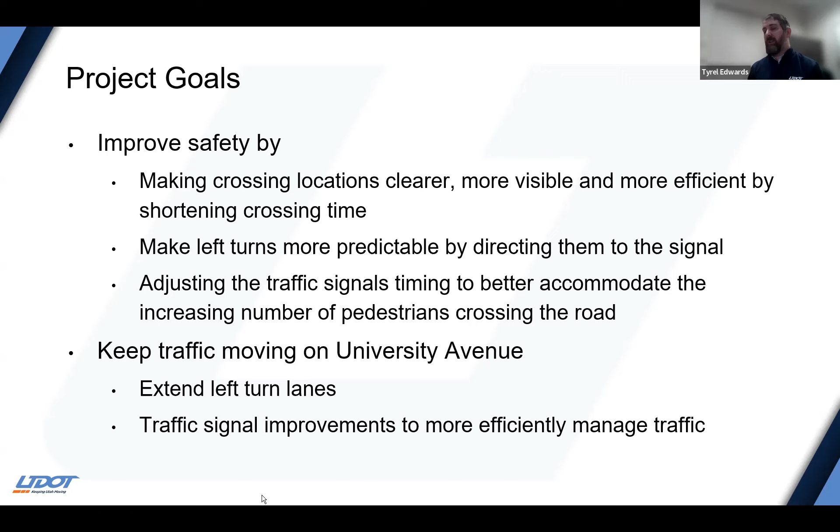And we also want to keep traffic moving on University Avenue by extending the left turn lanes, helping that left turn movement that is up at Cougar Boulevard that has some impact on this signal, and improve the traffic signal just by more efficiently handling the traffic at this intersection.

So the proposed changes for this intersection can kind of be broken out by the road that we're on. The main goal is to realign Canyon Road on the east side to square up the intersection. Right now, it comes in at an angle that's not really ideal. And by realigning that intersection, we can improve the visibility for all members of the traveling public, for the pedestrians, for the bicyclists, and for the people who are driving through this intersection. It helps people to be able to see each other and be aware of what's going on.

We're going to eliminate one of the existing east side pedestrian crosswalks across the free right. This helps us to move pedestrians to a place where they have a more managed, more controlled crossing. It's safer if they can cross where the signal is. Other improvements on Canyon Road, they're not necessarily on this list, but we are adding painted green bicycle boxes on Canyon Road. We're adding a sidewalk to the south side of Canyon Road to help pedestrian traffic as they move there.

And then we're also adding a through lane to provide access to BYU's Western campus right now and as it develops in the future. And then for University Avenue itself, we're going to be closing that free right, like I mentioned before. This will reduce the overall length of the crossing and consolidate all those crossing movements to a more

controlled setting. Pedestrians crossing at Canyon Road right now have some issues with visibility, and there's some issues where the shoulder lane that exists right now has bicyclists traveling on it. Drivers can tend to encroach on that shoulder as they take that free right. They take it at high speed. The exit to the Zions Bank property is impacted. It's difficult to see vehicles that are entering that free right as you leave the Zions Bank. So there's some improvements to safety by removing that free right.

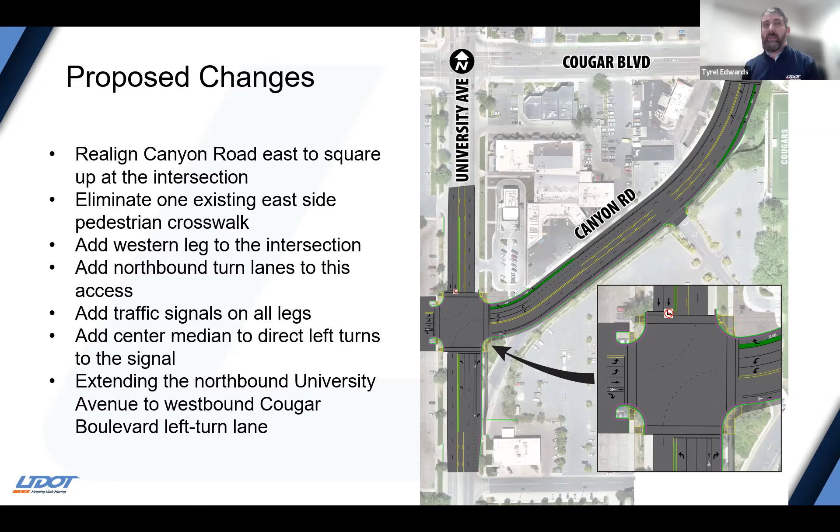So potential impacts of this project are the raised medians. We do know that they impact people's access to parcels and to properties along the road. We're keeping them short in this case, and the main benefit of them is safety. That's our main concern, is improving safety. It can be a difficult thing to manage safety, as we have drivers trying to enter a two-way left turn lane from both directions, trying to go to opposite sides of the road. It presents some conflicts that we're trying to help alleviate.

And then the realignment of Zions Bank. So with us removing the free right, we're removing the access or the exit from Zions Bank from that free right onto University Avenue. Vehicles will still be able to either stay in the right turn pocket and go back onto Canyon Road, or go up northbound on University Avenue.

All right, Lee, I think you wanted to have Tyler move into this one, right? I'm over here talking away with my mute on.

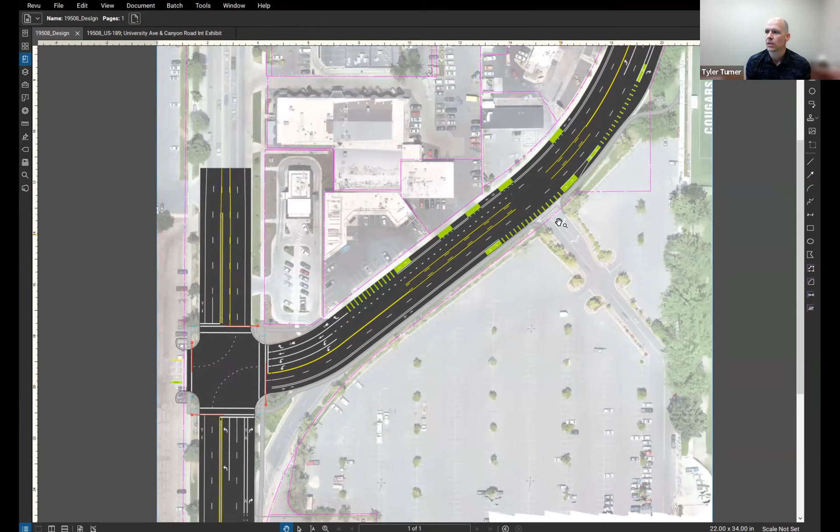We're going to have Tyler walk us through the design in a little more detail. So let me get that shown here. Can you see that, Tyler? Can. Tyrel did a great job in giving us an overview of the improvements that we're looking at this intersection. Lee, if you would zoom into the intersection. Let's start there, and then I'd like to go along each leg of the intersection.

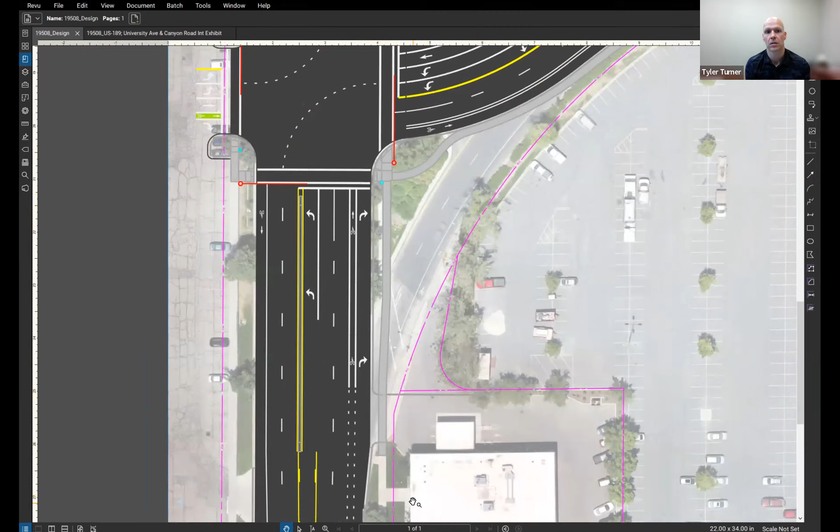So as she zooms in, you're going to see the realignment of Canyon Road off to the right to the east direction. That improves safety by squaring up the intersection, and continues to provide the dual lefts. As we look along the south side of the intersection, so as we go south towards Zions Bank, you'll see the yellow lines there, just to help everybody understand.

When we talk about the raised medians, you can see the left arrows. That is just a short distance of that. And again, as Tyrel mentioned, by including just that short distance, it improves safety. It helps control turning movements to make sure that we prioritize and keep the signal optimized as it's running, but also make sure that we don't have conflicting movements going into accesses.

You'll see as we zoom in towards the Zions Bank, the way that access is being configured, accessing onto University Avenue rather than onto that free right going onto Canyon Road. So you can see what that looks like. That will restrict left turns out of there. We have been in contact with Zions Bank and initiated that, and so far those conversations are going really well.

As we continue north, maybe just one point before you move on, off to the left side on the BYU property, there's an access. One of the things that we're doing, and I'll try to point them out as we go along this design, is we're actually consolidating accesses where we can, and coordinating with those property owners. It's just improved safety as you consolidate those accesses and try to get it all to a single access, especially when there's a signalized intersection close by.

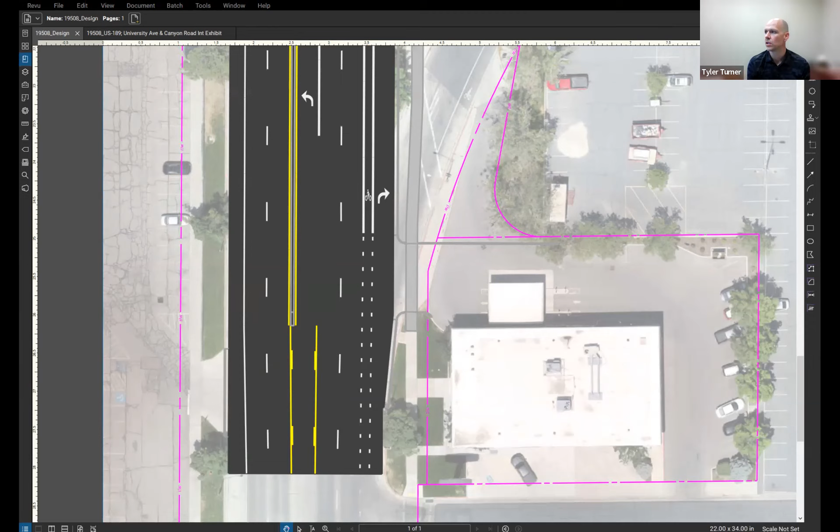So as you go towards the north, you'll see, go ahead. I couldn't get my mouse. I apologize. No worries. So let's spend just a second here.

You'll see how the free right has been closed off. We still maintain a right turn lane, and that will be dedicated. But we do show closing that free right. You'll also see that we have added, if you go just a little bit further north, there are 2 crosswalks crossing US 189 or University Avenue.

As we've talked about with the projected improvements of BYU, pedestrian crossings are predicted to drastically increase here. That's been a big focus of ours as we've talked about the improvements of the intersection, and those crosswalks have been a big part of that. So we'll have crossings on both sides.

Off to the left, you'll see the access has been created into the BYU property. So the 4th leg, or the west leg of the intersection, as we've been calling it. The plans of BYU's property we can talk about later, but you can kind of see that we've accommodated access into the signalized intersection by creating those actual lanes designation, which will be coordinated by the traffic signal.

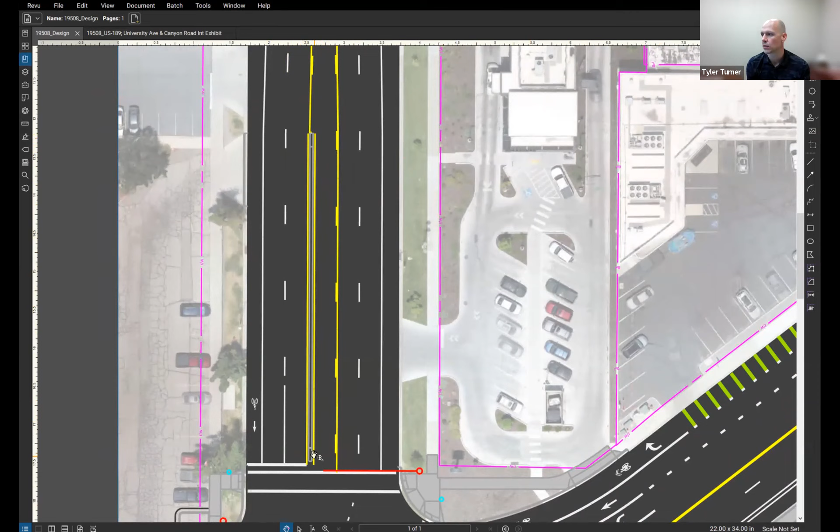Tyler, can you explain when you talk about the roadway geometry, what that means? Sure. If you look at Canyon Road, you'll notice that it doesn't tee in like a 90-degree angle. As you go away from the intersection, it starts to angle towards the north. If I'm going south on University Avenue and I'm trying to turn left onto Canyon Road, that angle makes it extremely difficult, especially for large trucks with trailers.

And their trailers, as they track, will have issues and create potential conflicts with that left turn. So we try to avoid that the best we can. This does improve that at this intersection, but as we've modeled things and looked at that, it still doesn't meet the requirements. The good news is, we've looked at the traffic analysis, not only at this intersection, but it's been coordinated with the traffic signals along University Avenue.

And these improvements don't drastically change that. So some might consider that left turn important. The good news is we can make these changes and those needs can still be met at those adjacent intersections.

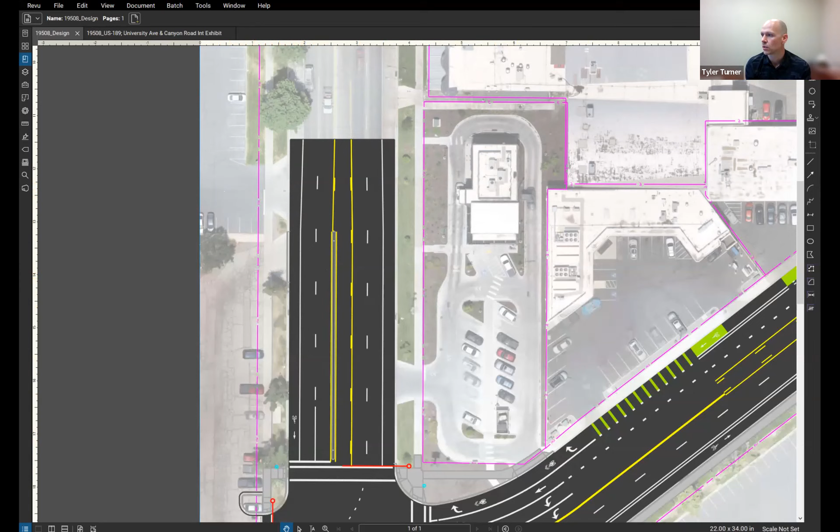Let's go along Canyon Road really quick if we can. A lot of you are probably familiar with the striping and bike lanes, active transportation improvements that were recently completed with Cougar Boulevard. This project does not have the medians, but we're proposing extending the buffered bike lanes and some of the pavement markings along here to create that consistency from BYU, Cougar Boulevard, and into the BYU West campus.

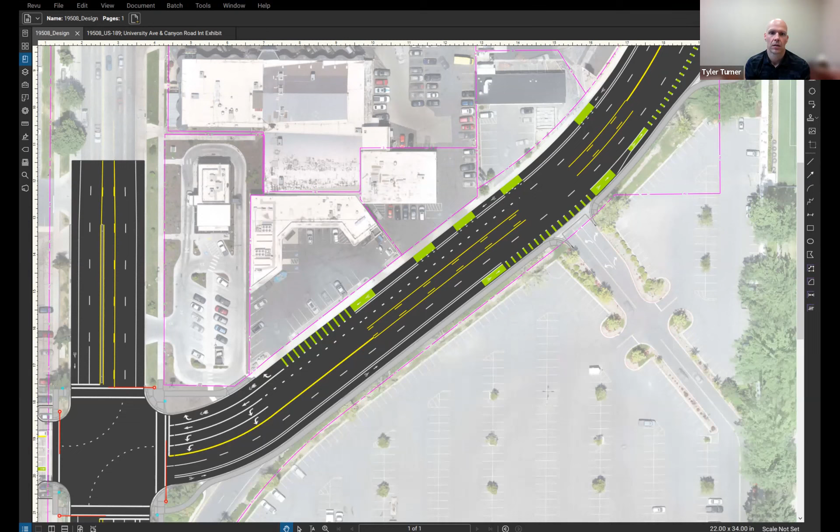So you'll see the green that designates conflict points with traffic. So it helps the cyclists anticipate vehicles and vice versa. The other thing that we're doing along Canyon Road with the anticipation of those increased pedestrians is we're reconstructing the south side of Canyon Road and creating a sidewalk. Again, another improved access along Canyon Road to the intersection and eventually across to University Avenue. And those improvements will go all the way to Bulldog or Cougar Boulevard.

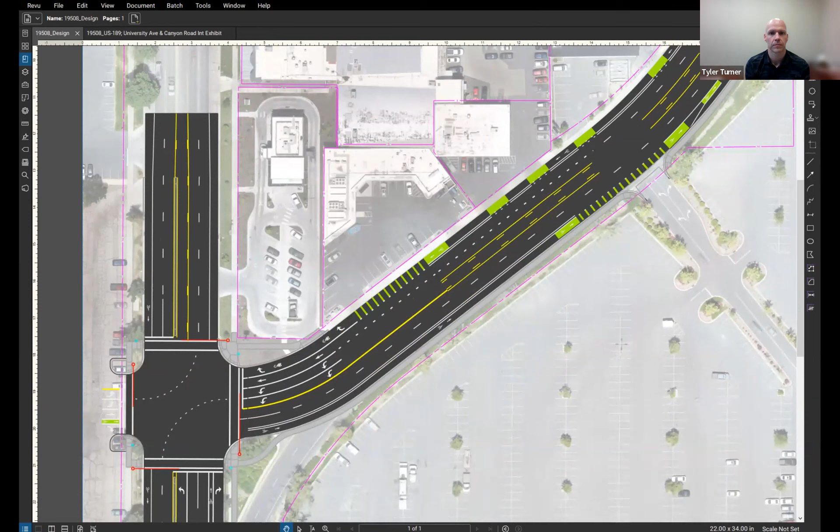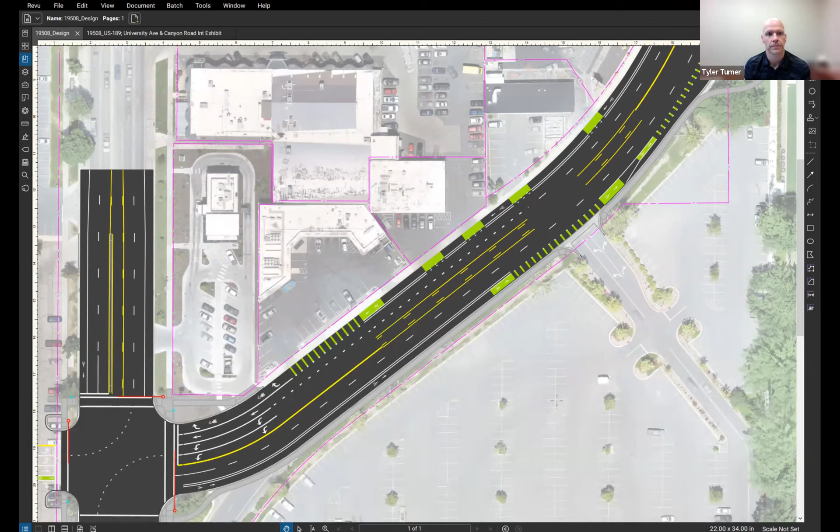That's the main points of things that are being proposed with the project. Great. So we've got a few questions in the chat. I'll turn off the design, but panelists, as you are responding, if you'd like me to turn it back on, just let me know.

So the first question is, what is the project budget and where are the funds coming from? Tyrell, can you speak to that? Definitely. Let me turn my camera back on. So currently the project budget is set at $2.8 million, is what we're estimating total project costs to be. Project funds are coming from three different parties. They're coming from UDOT, from Provo, and from BYU. Our final agreement hasn't been signed, but that's what we're working with right now, funds from those three sources. Thank you.

Okay, will there be a dedicated right turn signal arrow which will remain green during most intersection movements in order to imitate the soon to be deleted free right? So Tyler? Yeah, currently that is not being included. Again, part of what allows for that is the left turns or restricts that. That's something that we were talking about. We just completed the traffic analysis and we're in the process of refining the signal timing. So right now it's not currently part of it, but it's not necessarily off the board either.

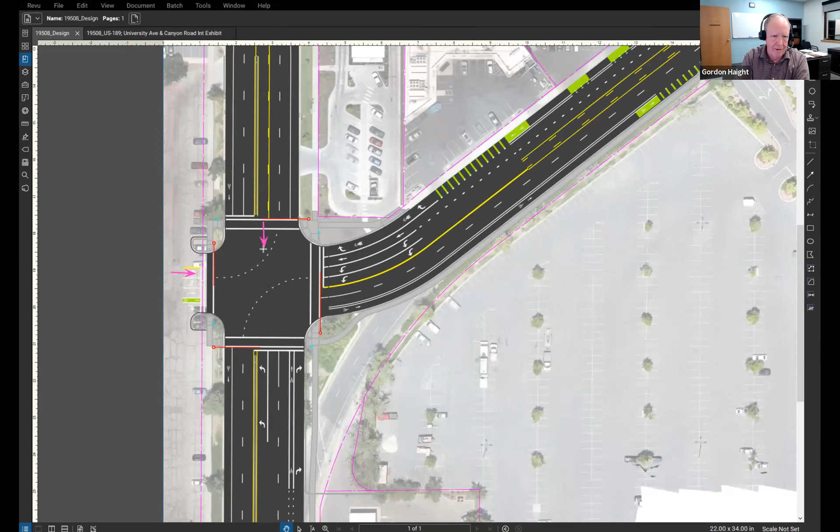So maybe we could take a quick look at that one more time and see, until that property redevelops, is that going to really have the dual lefts volume? I think the layout, the lane configuration, is really important, but let's find out if we do need the dual lefts to empty out the volume. And if we don't, then maybe it would be valuable to look at something else.

Which lefts are you talking about, Gordon? Because I got confused. Oh, the dual lefts coming out of this one? Yeah, the dual lefts coming out of the old Provo High property. I'm just looking at them. If we have that level of volume, then we need to keep the dual lefts going. If we don't, maybe there's an opportunity to do an island through there just because of how dense the population of pedestrians is going to be in that area. Again, there's no engineering in any of my comments. I just had some thoughts.

That's definitely something we can talk about for sure, Gordon. Right now I like the dual lefts, but we've got to verify what the volume of traffic is in the short term. And then when that redevelops, we could look at it again and see what it really needs to be.

Okay, because I read that comment as... okay, maybe I misinterpreted it. No, it is a good point, because I was wondering the same thing, but the way I read that comment was actually a ped refuge here. Oh. I didn't read the whole comment. I'm gonna put my glasses on next time.

But I actually think your point is well made, and that's something I think the team should look at, right? Does that dual left need to be there, or could it be an island or something else? Because if the point is the geometry of lining up the lanes... I want people to cross all the way across University. I don't want anybody in the middle of that. So I want to make sure we have good timing to get people out of that intersection.

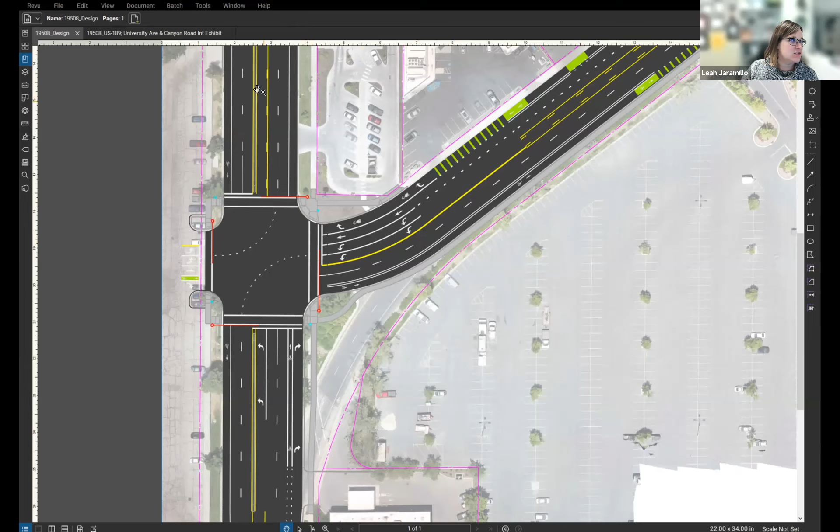John asked, is there any reason the left turn restriction doesn't extend all the way from this intersection to Cougar Boulevard? So I think that's the median, the raised median extension. Is there a physical raised median here now? Or why does this not connect all the way, Tyler?

There's not one today, and that's something that's been discussed with the team. Part of it's the balance of that access control. That's something that will continue to be talked about. The plan is to put it to that point. There's also been discussions as BYU finalizes their plans, and I remember comments that that'll be looked at holistically along there, all those accesses, and if those have been addressed and that's an opportunity to extend it, I think we would, and that might eliminate the need for that median.

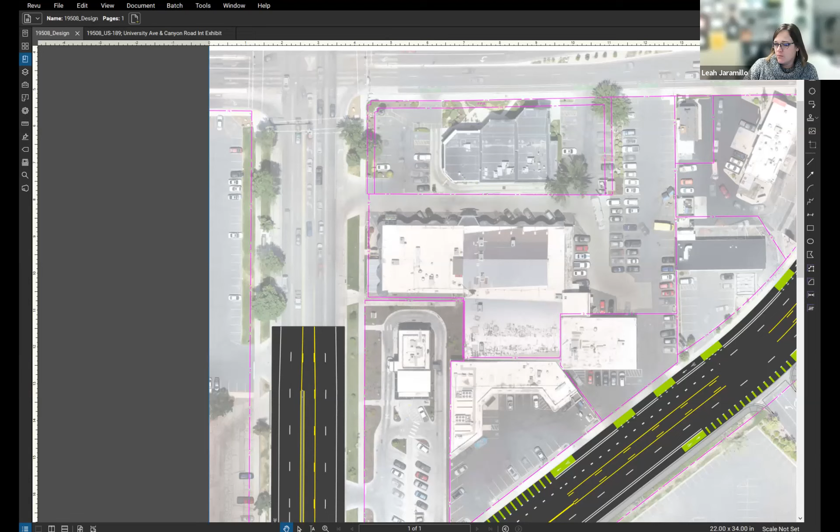Paul says there are less than 100 parking stalls on the West Campus property. Will BYU be funneling traffic to this intersection from the larger parking lot north of the building? So, Paul, are you asking about parking from the Cougar Boulevard side, coming onto University and back in at this intersection?

I think he may be talking about moving. So right now, those two different parking lots are separated by some sidewalk. There's a little bit of grade difference. And he could potentially be asking about BYU's plans for interconnecting those two parking lots. That's how I read it, but I could be wrong.

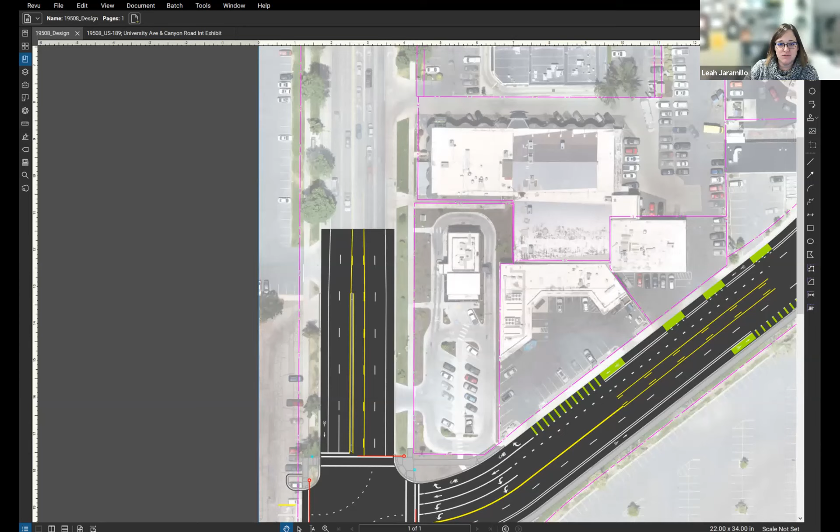I can't find him to unmute him, so I don't know if he's still in the meeting. No, I'm here. Great.

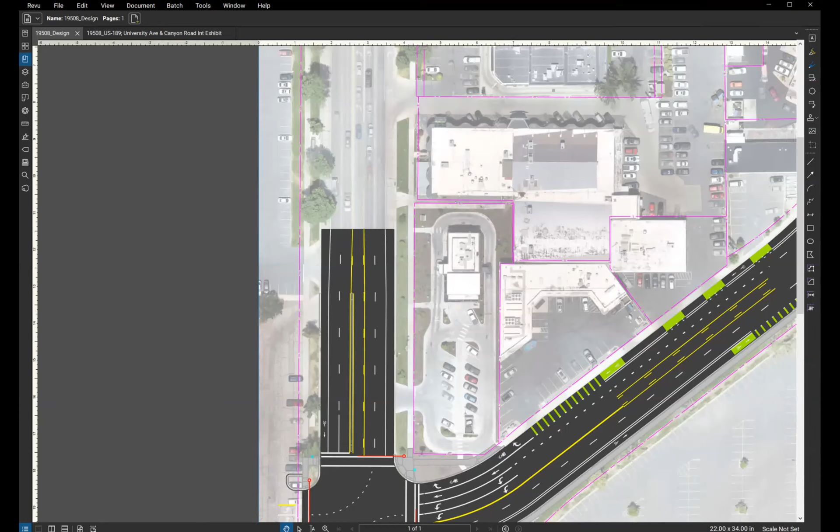It's just there's, parallel with University Avenue, less than 100 car spots. So the 5-lane access at that point would be for servicing less than 100 stalls. So I'm still trying to understand where the volume of cars is coming from that will require 5 lanes. Ole, can you answer that one?

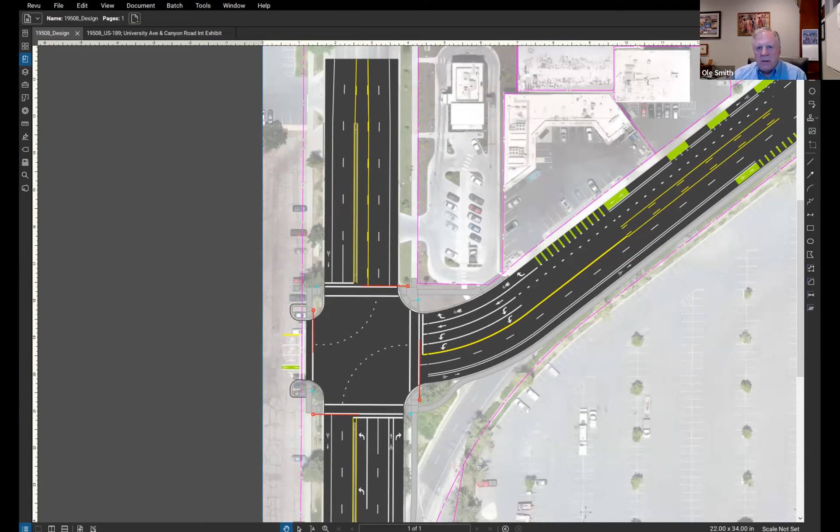Yeah, the situation at the former Provo High School is a temporary situation. And the parking lot directly in front of it, the long skinny parking lot along the east, currently may access that, but it's going to be tied together with the large parking lot. And in order to not have multiple exits onto University Avenue and Cougar Boulevard, and to have cars coming out right and left all over, we plan on working with UDOT and with Provo City to make sure that it's enough to empty the parking lot sufficiently, but not to have an overabundance of entrances and exits.

And so that little fence that currently separates the two lots is not a permanent situation and will go away at some point. I think also, Ole, the intent is some sort of redevelopment at some point, right? It doesn't just stay parking lots.

Oh, that's absolutely correct. I believe it was Gordon that said, and I know UDOT feels this way, we're not looking to do something that's just going to work for the next 2 or 2.5 years. We're looking for something that's designed to fit the future and that's going to work well into the future, so that we're not going back and having to remodel something shortly after it's put in. We're looking to the future.

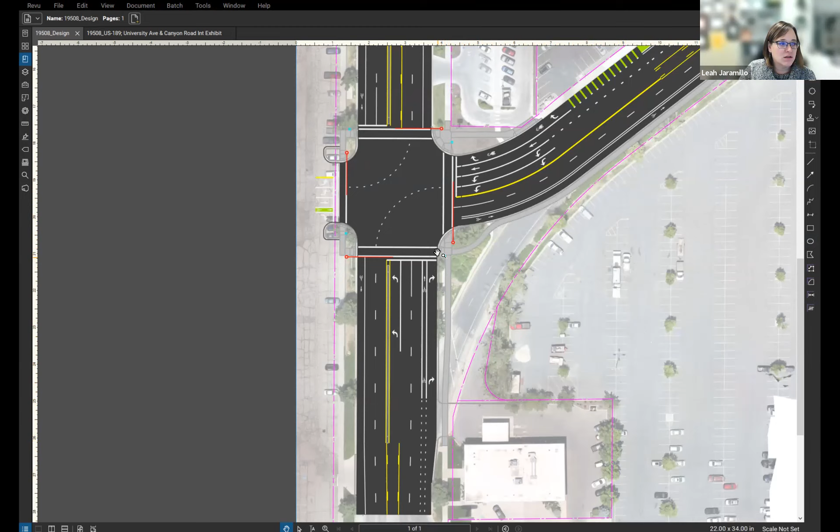All right. Could a shortcut bike and ped path extend through that freed up space instead of taking them to the intersection? I mean, I wonder if people will use that anyway. If the old asphalt is there, I wonder if people will ride or walk that way. But the intent is to bring pedestrians along this sidewalk path. Is that correct?

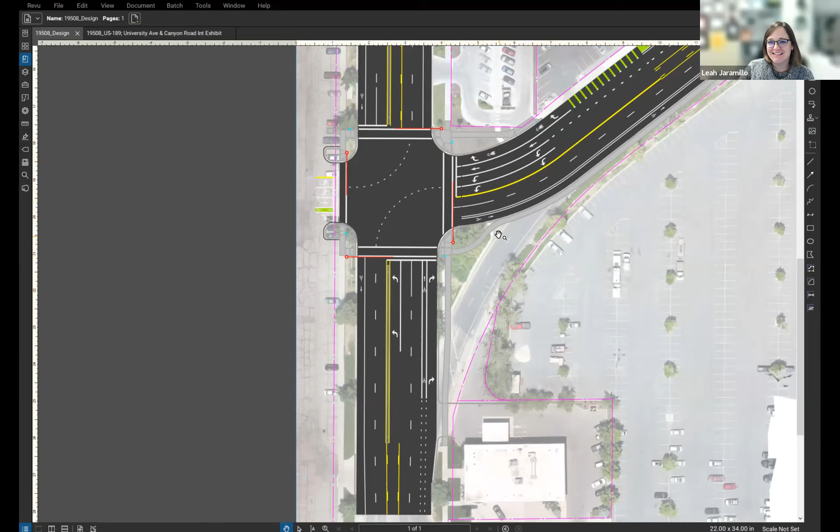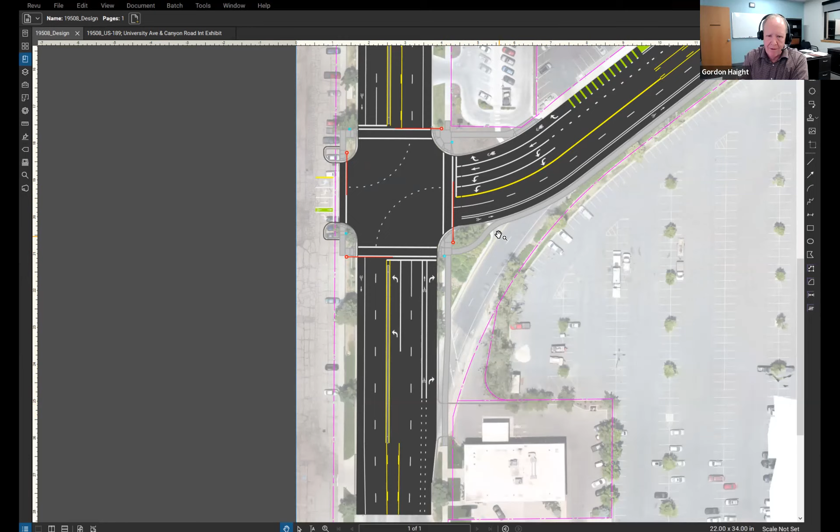You know, we probably need to look at that site, but the problem is we're not going to be ready with what we're going to do with that site, and we need to get that right eliminated. So I think these are great questions, and they're really good comments that we ought to master plan this corner to make it not only nice but functional.

And there's probably some opportunities to put a bench and other things that just make it look pleasant in that area, because I think BYU is going to do a good job with their redevelopment and with that parking lot. We ought to figure out some stuff, but I don't think we're prepared to do that yet. And so we'll sit down with BYU once this project gets moving forward, and we'll figure out something.

And one of the things I want to really comment is we need to get that sidewalk built up Canyon Road. And so just getting that in place, if we have to make some changes here when we redesign that, we'll work with BYU to do that. And that will be a project we'll do next phase to see if we need to have pedestrian or bike or scooter cut through. I don't necessarily have any problem with those, but let's figure something out and master plan that a little bit better. So there's nothing I can say to it right now. Thanks, Gordon.

We've got about 10 minutes left. Leo had asked to make a comment, so if we're okay with that, we'll allow it. Also, if there's any other questions or comments, you can put them in the chat, please do so. And here we go, Leo. Let me see if we can get you unmuted. Is it letting you unmute? Okay, can you hear me?